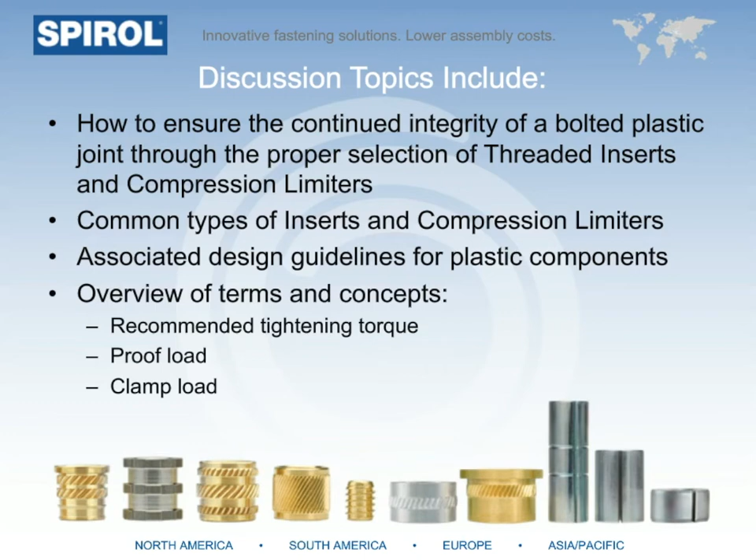So a brief overview about SPIROL. SPIROL is a global manufacturer and supplier of engineered components used for joining, fastening, and assembly. We have 12 major product lines, each one designed to improve product quality, simplify the assembly process, and/or reduce the overall cost of the assembly.

We're the only company who designs and manufactures both our engineered fasteners and installation equipment. Our focus is not just about supplying high-quality product, but working with our customers as early as possible in the design stage to help them design not only the fastener, but also make the critical recommendations between our product and their components so that their assembly goes together and stays together for the intended life of the assembly. To accomplish this, we have applications engineers located around the world who are ready to work with you on your new or existing applications.

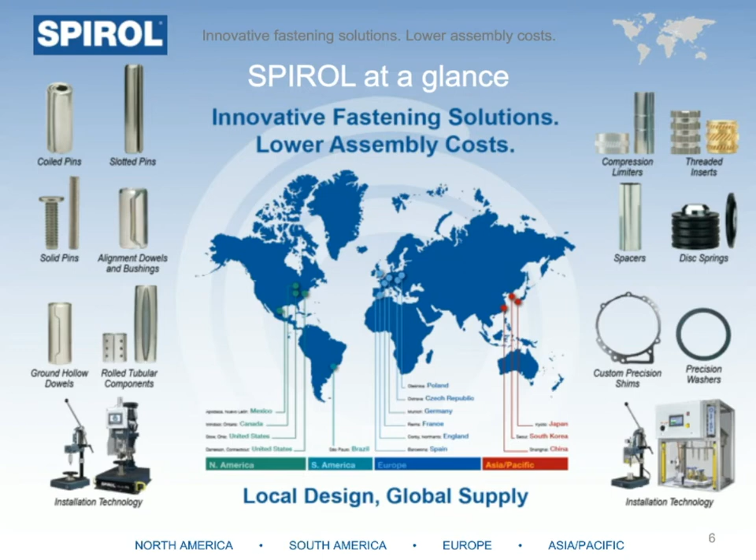So today, obviously, we're focused on inserts and compression limiters for plastics assemblies. So where are the inserts and compression limiters really used? Well, in short, they're pretty much used everywhere in every market, such as automobile, agricultural equipment, rail, recreational vehicles, and they're also used in home appliances, medical equipment, hand and power tools, industrial equipment, and airplanes. They're literally used everywhere.

Some of the specific applications within these markets can be seen here. In the top left, we have compression limiters used in the front engine cover so that when the cover is bolted down, these limiters provide spot reinforcement to prevent the plastic from cracking. Next, you can see compression limiters in an intake manifold and compression limiters in a residential charging connector for solar-powered homes. In the lower left-hand corner, there's an example of threaded inserts used in a high-voltage switch assembly.

An oven handle where the bolt is threaded directly into the metal insert rather than into the plastic to ensure joint integrity over the life of the assembly. And finally, you can see an automatic pool cleaner housing that has literally dozens of inserts on both sides of the component.

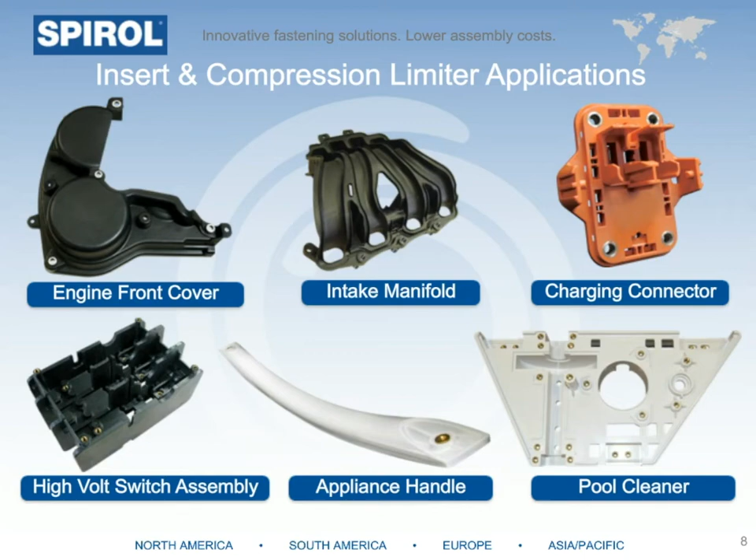Moving on to some of our important terms. When discussing the performance of our compression limiters and threaded inserts for plastic, it's important to tie them back to the component that designers are typically more familiar with, the bolt.

Bolt performance is defined by an industry specification that outlines how much force the fastener can withstand before breaking. The proof load is the maximum load that can be applied to the bolt without risking permanent deformation, where the bolt will not return back to its preloaded condition when the joint is loosened. The clamp load is how much load is applied to the bolt when the joint is tightened. SPIROL recommends that a joint is tightened to the clamp load up to 75% of the proof load because the bolt's load is directly related to the torque that the manufacturer applies when using a wrench or a torque gun.

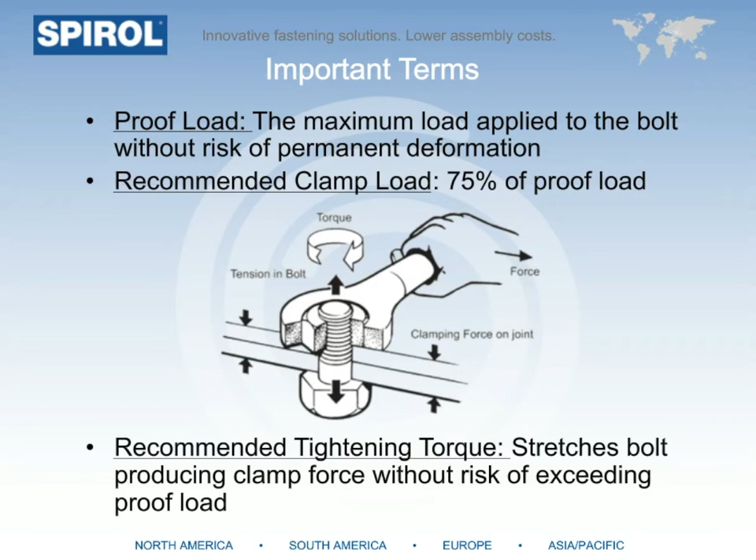The amount of load that a bolt can withstand is typically defined by the thread size and the grade for inch bolts, or the class for metric bolts. These are the most common bolt specifications defining bolt strength.

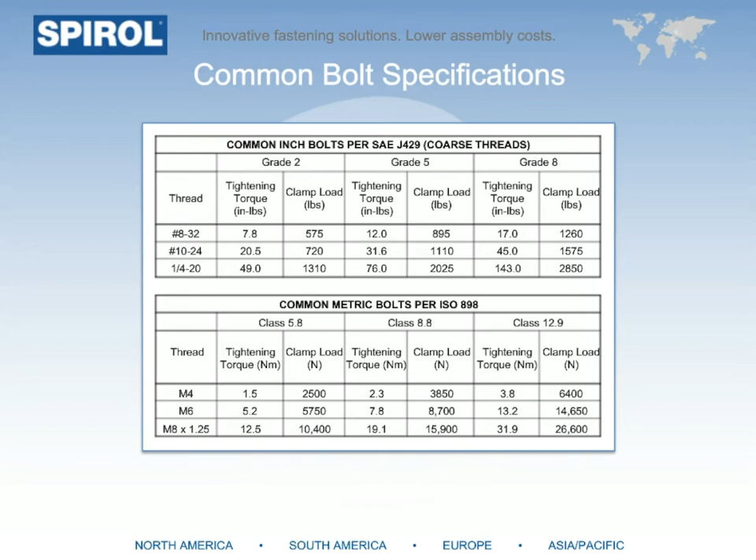So why do people use threaded inserts in plastic? Well, first and foremost, inserts provide reusable threads and secure tight threaded joints. Since you thread directly into metal rather than into plastic, you have unlimited assembly and disassembly without fear of stripping the threads.

You're also able to meet the proper seating torque for the bolt, given that the integrity of the plastic is there. And unlike when you thread directly into plastic, you do not have to worry about stress relaxation or creep that could result in a loose joint.

And finally, given that the OD of the insert is approximately 2 times the OD of the bolt, this results in 2 times the shear surface for enhanced load carrying of the bolted assembly.

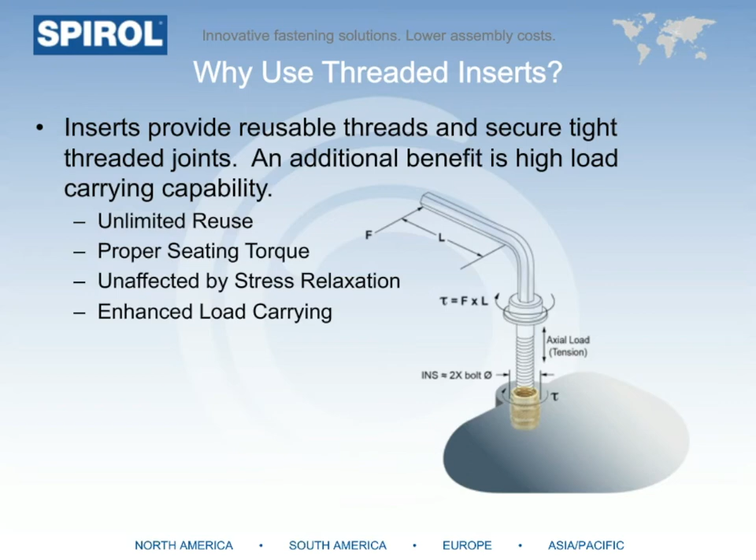Before we talk about what types of inserts are good for particular applications, we first need to review that there are 2 major types of plastics: thermoplastics and thermosets. Thermoplastics essentially can be melted and remelted a number of times into a number of different shapes without compromising the mechanical properties, whereas thermosets have a one-time reaction from liquid to solid and cannot be remelted.

Both thermoplastics and thermosets can be strengthened, though, through the use of glass or mineral fillers. Usually the higher the percentage of filler, the stronger the plastic.

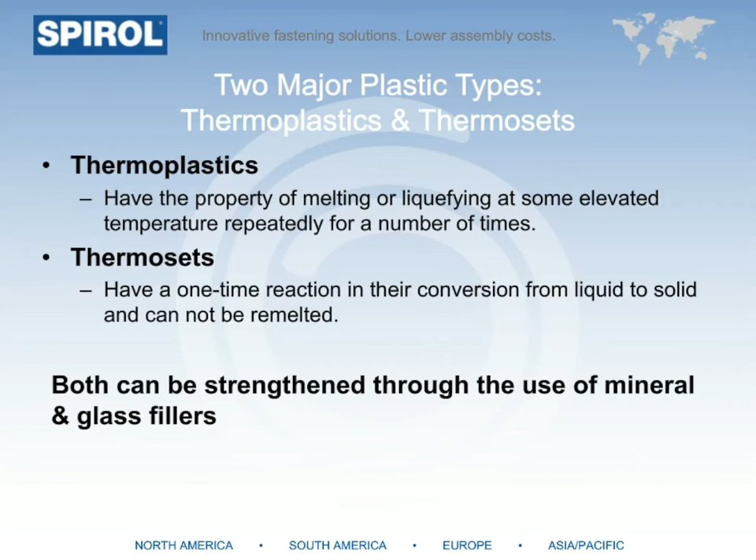SPIROL threaded inserts are categorized by the primary method of installation. Some inserts are designed to be molded into the plastic when it's fluid. This lets the molten plastic flow around and into the more aggressive features on the outside of the insert.

Most inserts are designed so that they can be installed as a secondary process after the plastic is cooled. These are referred to as post-mold installed. Post-mold inserts can be installed a variety of ways, by either locally remelting the plastic, by pressing them into the plastic holes, or even by screwing them directly into the plastic.

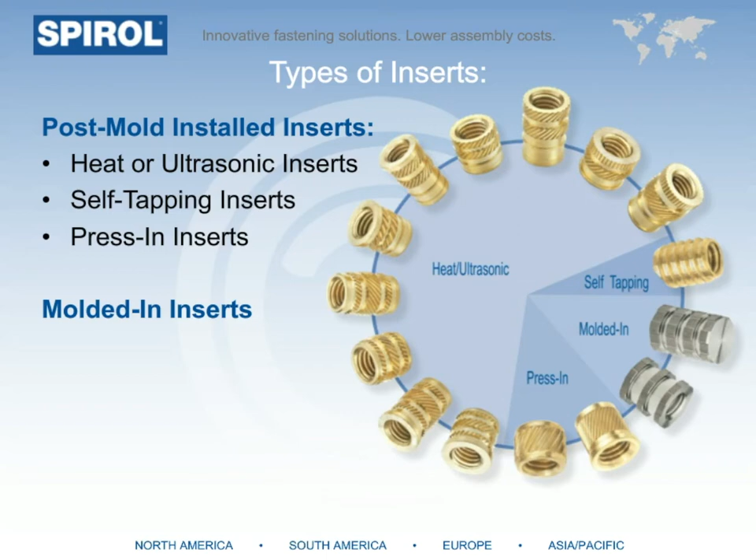Inserts should be designed with sufficient torque resistance to accommodate the tightening torque required for the bolt to prevent loosening and to achieve the pull-out values necessary for the load conditions that the insert will be exposed to while in service. In general, the resistance to rotational torque is a function of the insert's diameter, and the resistance to pull-out, also known as tensile, is a function of its length.

The designer's challenge is to determine the best balance between these 2 design criteria and optimize the performance in the space allotted.

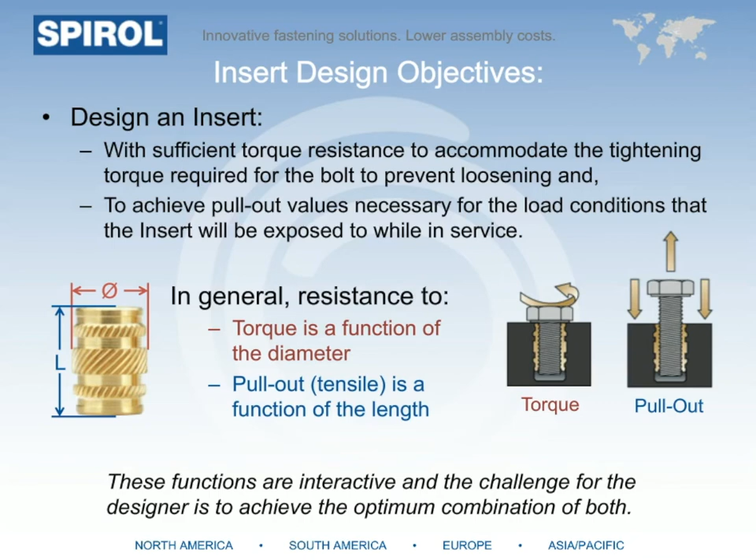The internal threads of the inserts are designed around industry standard metric and inch bolts. As far as the external features of the inserts go, essentially, performance of the insert is generally achieved based on the amount of displaced plastic filling the various types of features of the insert.

There are typically 3 different types of knurls: diamond, straight, and helical, and they are primarily used to increase resistance to torque. Straight knurls have the best resistance to torque since they're perpendicular to the force, whereas helical knurls provide resistance to both torque and pullout as they're at an angle.

Finally, diamond knurls, frankly, they're just not great for much of anything. The reason being that if you press a diamond knurled part into plastic, the diamonds literally shred the plastic during insertion. The most popular type of insert where you see this diamond-style knurl is on what they call an expansion-style insert, shown here in the upper left.

As the insert is pressed into the plastic hole, the slot closes. As the bolt is installed into the internal thread of the insert, the bolt ends up opening up the insert and pushing the sides of the insert against the hole wall, such that the diamond knurl bites into the hole wall to hold the insert in place.

However, reality is performance of this style insert is pretty low, yet the cost is much higher than most other styles of inserts. As a matter of fact, SPIROL has since replaced the expansion style insert with other press-in styles that have much higher performance at a much lower cost.

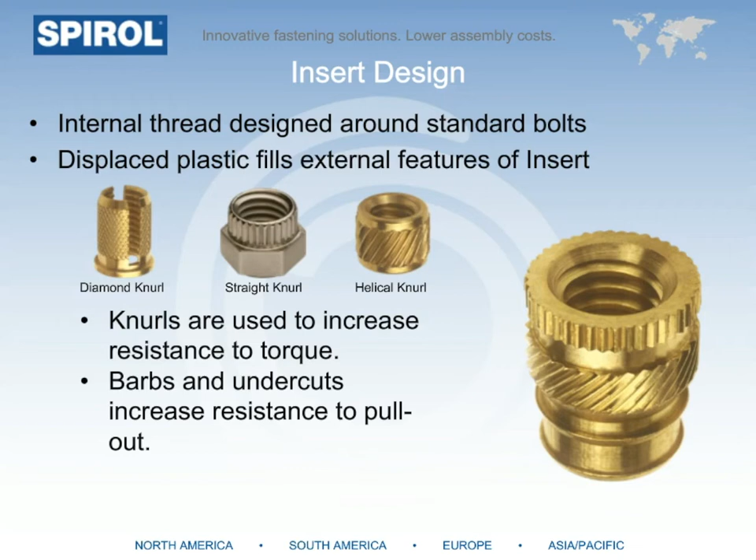So there are many different types of inserts, and in order to specify the best insert for a particular application, it's critical to understand the plastic specifics, meaning not just whether it's a thermoplastic or thermoset, but what specific type of plastic it is and what percentage of filler it has, and if possible, the brand name of the plastic.

So as an example, GE Cycoloy C2950, which is a PC ABS blend with 0% fill, or perhaps you're using DuPont Nylon 66 with 30% glass fill.

We also need to understand the geometry of the host component, including available space for the hole diameter and wall thickness, what bolt size you are planning on using, as well as the grade or class.

This is super important because, as Tara reviewed earlier, the class or grade actually dictates what the recommended tightening torque is for that size bolt. We also want to make sure we understand the performance requirements for the application—torque and pull-out or tensile—and what the mating component configuration is. And finally, how do you plan on installing the insert? Will it be molded in or post-mold installed? If post-mold installed, will it simply be pressed into the assembly, heat or ultrasonically installed, or tapped into the hole?

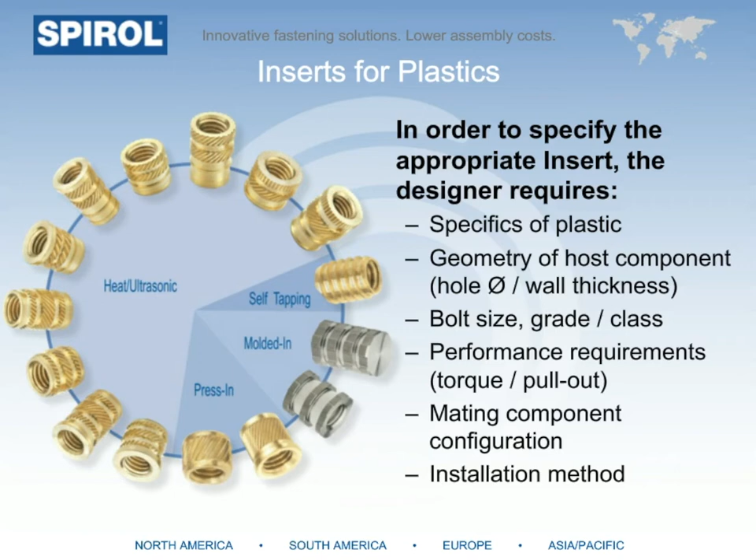As Christy alludes to, there are many factors besides insert design that impact how the insert will actually perform in the application. The quality of the interface between the insert and the plastic component is critical to how much the insert can withstand rotational and axial loading. Installation also greatly impacts the quality of this interface.

It's been said up to 75%. The image to the right demonstrates how SPIROL recommends validating installation quality through a destructive test. We recommend cross-sectioning the plastic with the insert installed so you can see the interface between the insert and the plastic.

There should not be any voids present between the insert and the plastic. Then the insert can be removed from the plastic, and you should be able to see a mirror image of all of the insert's features in the piece of plastic. As you can see in the incorrect example, the knurl's imprint in the plastic was very shallow, and there's no evidence that the barb actually engaged the plastic.

Some common errors that lead to poor installation are listed to the left, but in this example, you can see there was probably an incorrect hole size that was too large, not allowing enough plastic to flow into all of the insert features.

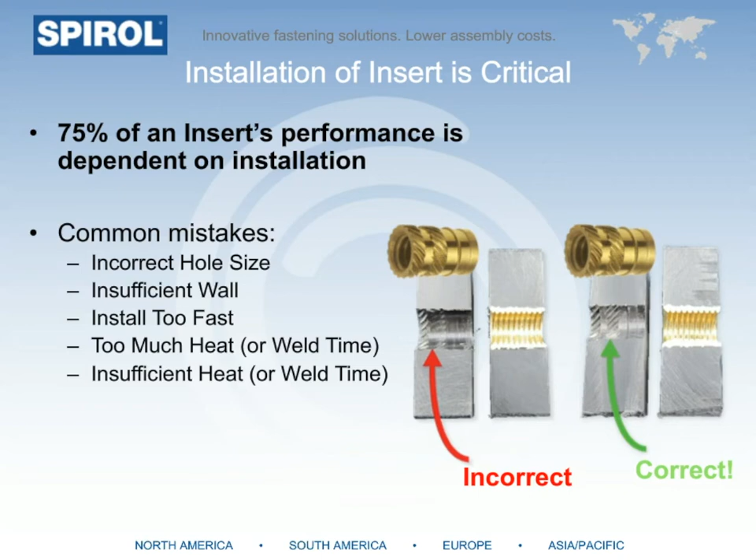It's not just the interface between the insert and the plastic host component that's critical to performance. The mating part also can significantly reduce performance by not providing enough of a bearing surface on the insert, which we call a jackout condition. With the hole size in the mating component larger than the face of the insert, there's nothing we can do to prevent the insert from dislodging and moving up into the void of the mating part.

To avoid jackout, we recommend that the mating component's hole be smaller than the face of the insert, but large enough so that the bolt can pass through.

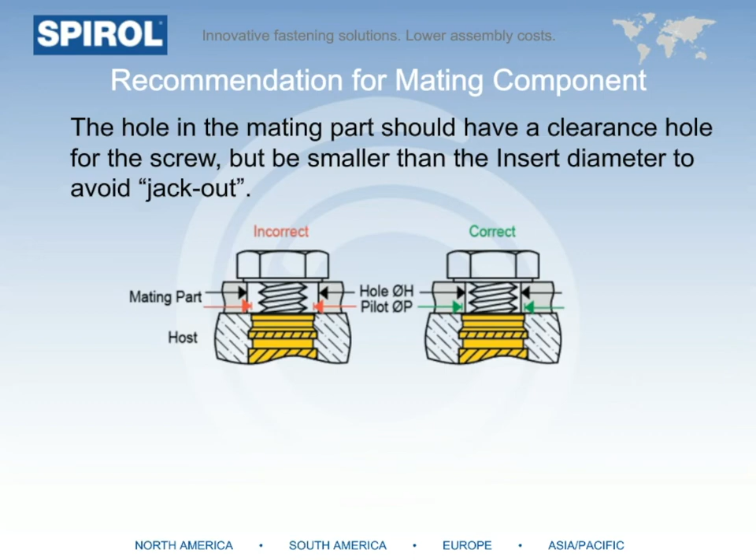When installing the insert into the hole, the top of the insert should be as close to flush with the surface as possible. Maximum protrusion above flush should be 0.13 millimeters, or 5 thousandths.

You really want to be careful about having the insert subflush, or else you risk jacking the insert out of the hole, or at least breaking the plastic plane while torquing down the bolt, which could affect joint integrity.

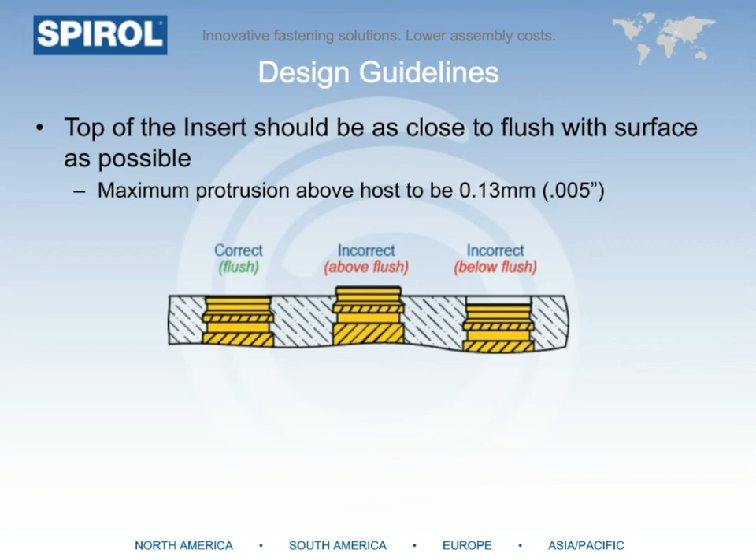In terms of the hole configuration, the diameter of the plastic around the hole, known as the boss diameter, should be sufficient enough to avoid bulging during installation and ensure integrity to withstand the recommended tightening torque. Also, the length of the hole must be long enough to prevent the screw from bottoming out in the event that it's a blind hole.

For heat or ultrasonic installation, the length plus 2 thread pitches is recommended to allow any flash or material buildup ahead of the insert a place to flow during installation.

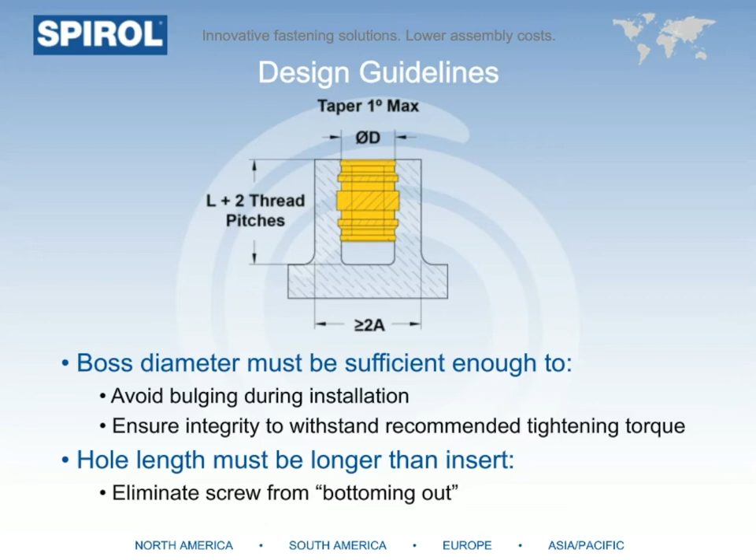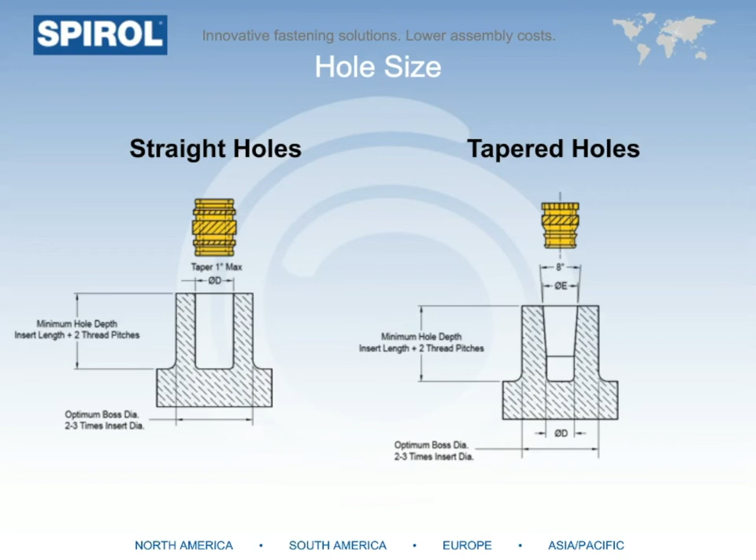The actual hole size is also critical to the insert's ability to perform in the assembly. For inserts used in a straight hole, it's recommended that the taper not exceed 1 degree inclusive, or half a degree per side. For inserts intended to be used in a tapered hole, the taper should be 8 degrees. The greater taper not only assists with removal of the plastic component from the mold, but also allows the insert to sit deeper in the hole, which facilitates square insertion and faster installation.

Regardless of hole style, it's imperative to hone in on the correct hole size for the application. As a general rule, larger hole sizes decrease performance, while smaller hole sizes induce undesirable stresses and potential cracks.

SPIROL's recommended hole sizes in our design guideline will typically need slightly positive adjustments, if any. Usually, the hole size needs to be adjusted upwards when the melted plastic is more viscous and does not flow very well, such as when fillers like glass are used. It is always imperative that the designer perform testing to validate the appropriate hole size for the application. SPIROL is also capable of assisting with this testing.

Just to show an example in the lower right, if there's no filler used, such as in a polypropylene plastic part, the recommended hole size for our M6 heat-installed insert is 8 millimeters with a positive 0.08 millimeter tolerance.

However, if the same component was nylon 6/6 with 35% glass fill, we would adjust this initial 8 millimeter hole recommendation up by 0.15 millimeters and then apply that 0.08 millimeter tolerance. The core pin used to mold the host hole should be large enough to allow for the plastic to shrink down once cooled and conditioned.

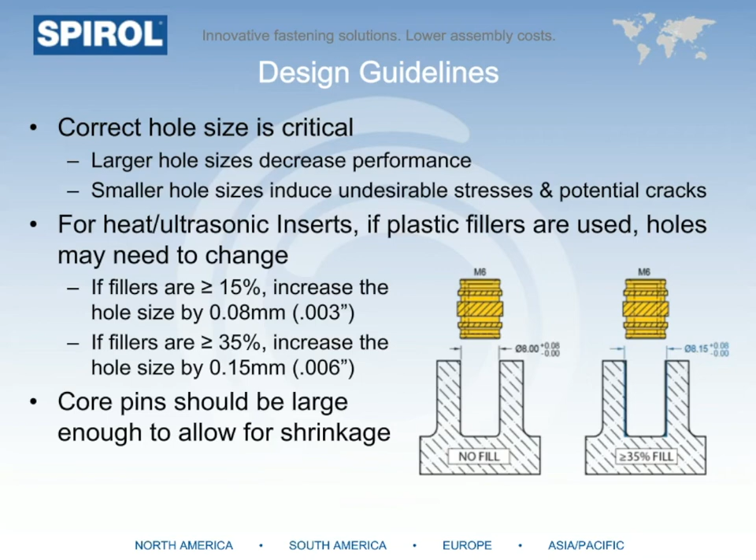In high-load applications, using a headed insert and locating the head opposite the load in a pull-through configuration warrants design consideration. That said, tapered inserts should never, ever be used in pull-through applications or in thin-walled bosses, as this will definitely cause cracking of the plastic.

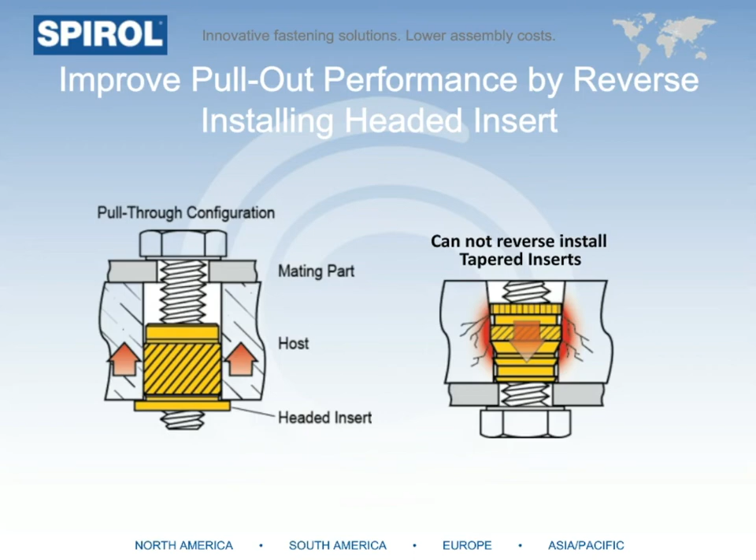Each type of insert differs in design, which yields different performance results, as well as the cost of the insert and overall cost of the assembly.

Starting with heat or ultrasonic inserts, some are designed for straight holes and others are designed for tapered holes. If you attempt to use a straight insert in a tapered hole, you will not optimize the performance of the insert design, and in many cases, you may end up totally cracking the plastic.

Symmetrical inserts require straight holes, and as Tara just said, tapered holes facilitate proper seating of the insert. Since the surface contact between the insert and the hole is maximized, installation time is usually less than that of a straight insert of the same size.

Many heat ultrasonic inserts are available in a long and short version of each thread size. Long lengths maximize torque and pull-out resistance, while short lengths are good for less stringent requirements at a lower cost and shorter installation times. You can also get most styles with or without a head.

The head provides a bearing surface for the mating component that also prevents jackout, or, as I said earlier, when used in reverse, can prevent a pull-through situation. However, adding a head comes at a cost because you have to start with a larger piece of raw material to create the head. Now, some non-headed versions are symmetrical, thus eliminating orientation during the installation process.

You can achieve excellent performance results with heat or ultrasonic inserts, provided that they are used in the proper hole size with sufficient wall thickness around the insert, and they are installed in a manner that results in proper melting of the plastic to fill the voids of the insert. Heat ultrasonic inserts generally provide the best balance between performance and cost.

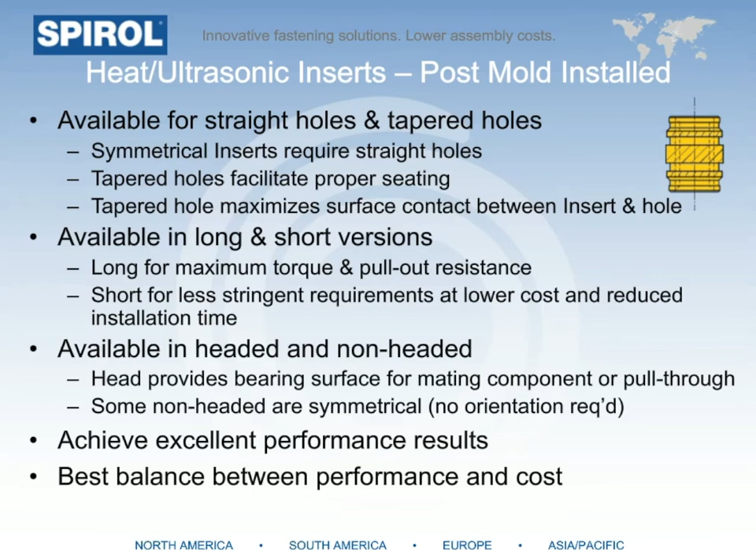Now notice the external thread on the self-tapping inserts. This type of post-mold installed insert is actually threaded into the hole after the plastic cures. The external threads are designed with a thin profile to minimize stress in the plastic and a relatively coarse pitch to provide the maximum plastic shear surface to resist pullout.

As a matter of fact, these inserts provide the best resistance to pullout of any of SPIROL's post-mold installed inserts. However, due to the external thread, the manufacturing cost of this insert tends to be higher than other types of inserts, and the cost of installation is the highest of all post-mold installed inserts, since care and time have to be taken to thread the parts into the hole.

The schematic in the lower right shows that the recommended length of the hole for this style insert is 20% longer than the length of the insert.

Counterbores are not recommended for any insert types except self-tapping and headed inserts. Counterbores are recommended for self-tapping inserts to reduce the risk of flaking. The outside diameter of the counterbore should be equal to or larger than the outside diameter of the self-tapping insert.

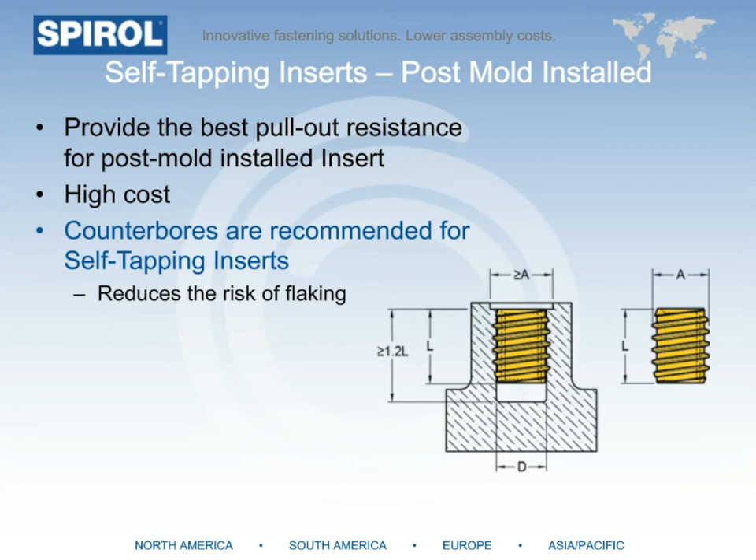Press-in inserts are designed to reduce installation costs. Helical knurls provide both torque and pull-out resistance. A pilot facilitates straight insertion into the hole. The pilot diameter is only slightly smaller than the hole, and the length is long enough to allow the insert to sit at the top of the hole prior to installation.

Press-in inserts are available with or without a head and provide good resistance to torque and pull-out. They are a great low-cost option for applications not requiring super high performance.

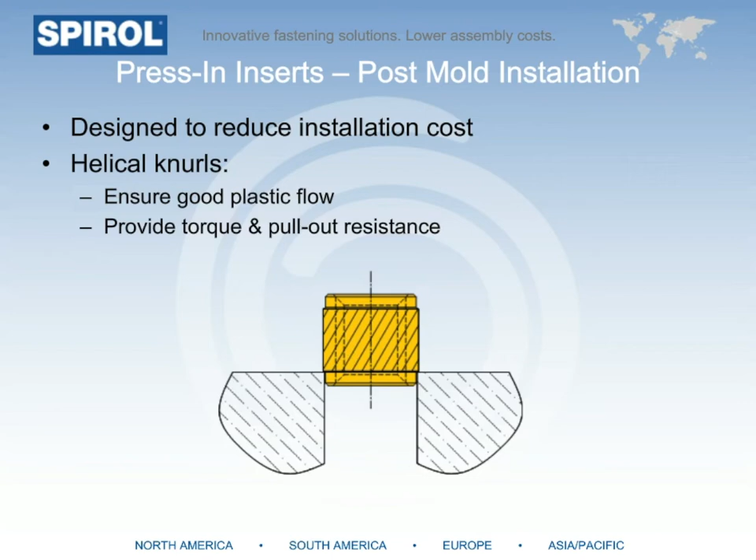On the other hand, molded-in inserts are designed for maximum pull-out and torque performance and are often the insert of choice for thermosets and engineered plastics with a high percentage of filler. The minor thread diameter tolerance is controlled to provide a repeatable fit on the insert on the core pin.

SPIROL offers a symmetrical version, eliminating the need for orientation, and a blind-ended version, which sometimes is preferred by molders. Unlike the rest of our brass inserts, these are made from 2024 aluminum, a lightweight, lead-free grade.

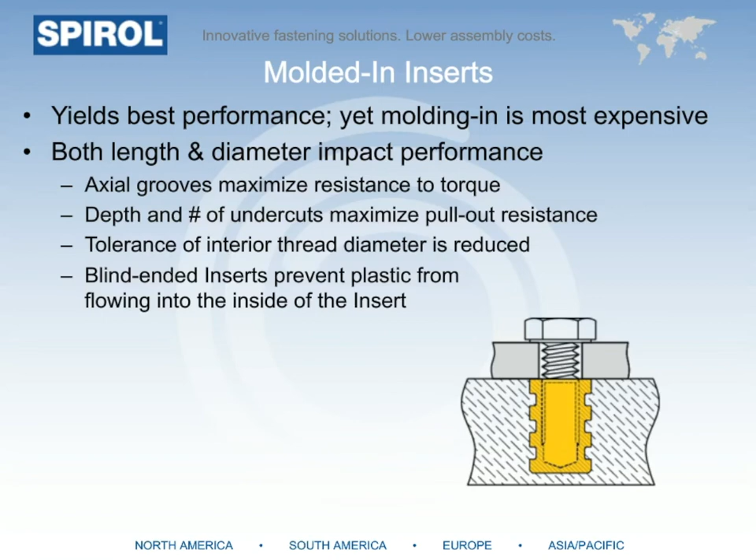In terms of using post-mold installed versus molded-in inserts, there are many factors to consider. Installing inserts after molding reduces in-place cost since molding time is shortened—there's no placing of the insert over core pins. Secondary cleaning of flash or plastic around the entrance to the hole, which often occurs with molded-in inserts, is also eliminated. Installing inserts after molding also reduces rejects and the chance of mold damage from a dislodged insert. Keep in mind some of these molds cost tens of thousands of dollars. Finally, a post-mold installed insert can yield excellent performance results.

Conversely, when molding inserts into the assembly, molding time is increased since you need an operator or a pick-and-place robot loading the inserts over the core pins prior to closing the mold cavity. Also, precise placement of the inserts is required, otherwise mold damage can occur, which can be really expensive since molds are expensive and so is downtime. That said, of all the different types of inserts, you definitely get the best performance out of molded-in inserts. So the real question is, what performance do you actually require for your assembly?

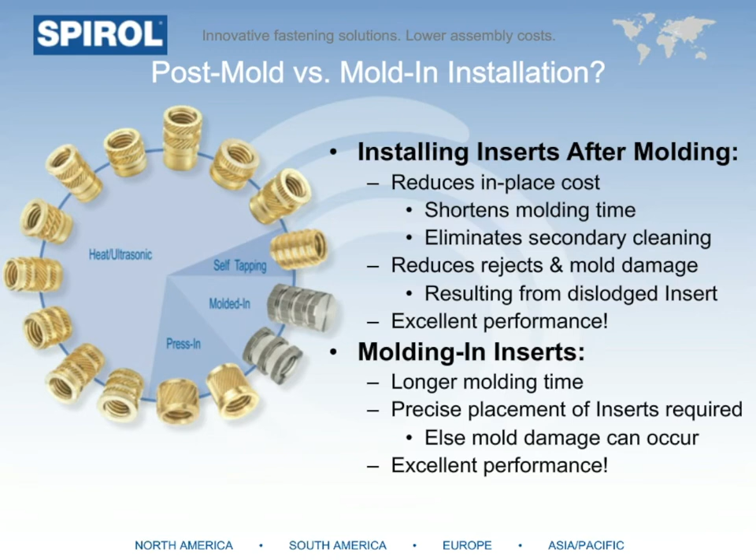One question we see all the time is: what affects the performance of an insert? The fact is there are so many variables that impact insert performance in an application—not only the insert design and the quality of features such as knurls, bands, and undercuts, but also the specific type of plastic will generally affect performance. For example, an insert installed in nylon 6/6 with glass fill will totally outperform a talc-filled polypropylene.

Also, the design and quality of the plastic molded part plays a huge role in performance. For example, are there knit lines in the boss surrounding the insert, or is the wall thickness of the plastic sufficient to handle the applied stress? Obviously, the actual hole size will also affect performance, and even hole size variation within the recommended tolerance range can impact performance greatly.

And finally, the installation quality impacts performance. For example, was the proper temperature used? Were the inserts installed too quickly? And so on and so forth.

In regards to temperature, another question we often get is what temperature should heat-installed inserts be installed at? We recommend starting with a temperature of 50 degrees Fahrenheit above the initial softening temperature for the plastic in question. For plastics with fillers, this initial differential should be increased to around 150 degrees. Pressure is insert-size dependent and should be as low as possible, in the 5 to 15 psi range—just enough to push the insert into the hole as the plastic melts.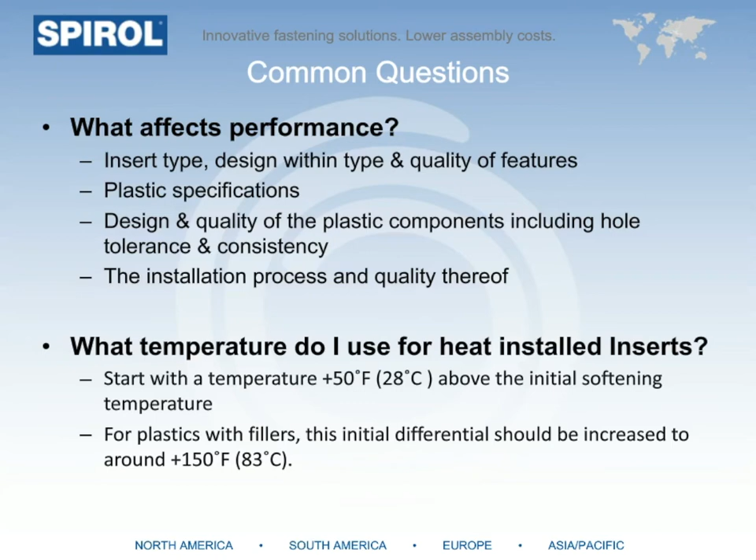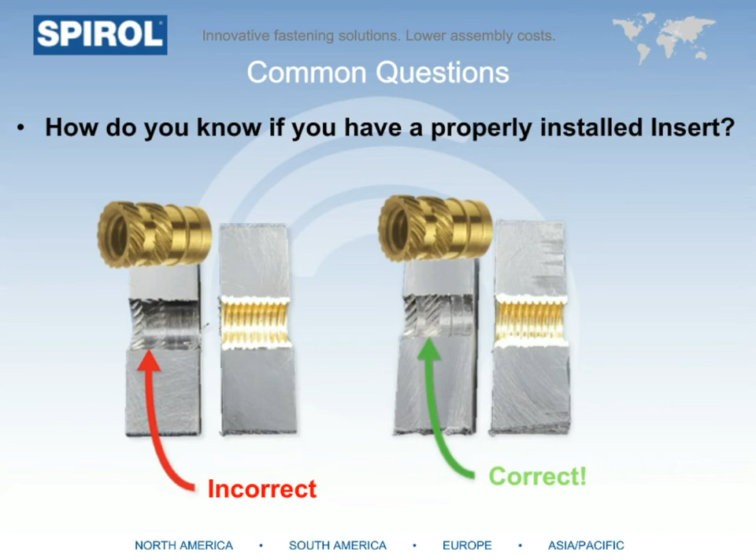And this by far is the most common question: how much torque or tensile strength can be achieved in my particular application with my specific plastic assembly? The reality is it's impossible to answer without testing in your actual assembly. Of all the factors that affect performance, and in addition, there are so many different types of plastics and fillers, and then percentage and orientation of those fillers within the plastics, coupled with the complexity of component design—it just makes it impossible to provide insert performance data which can be applied to specific applications.

Spirol provides a section in our design guide that displays the performance of various style inserts installed into nylon 6/6 without fillers, in drilled versus molded holes. There's a screenshot of that on the slide right now. The performance data here is provided as a comparative guide between insert types, not to provide the actual performance that will be achieved in a specific application. For this, you will definitely need to test.

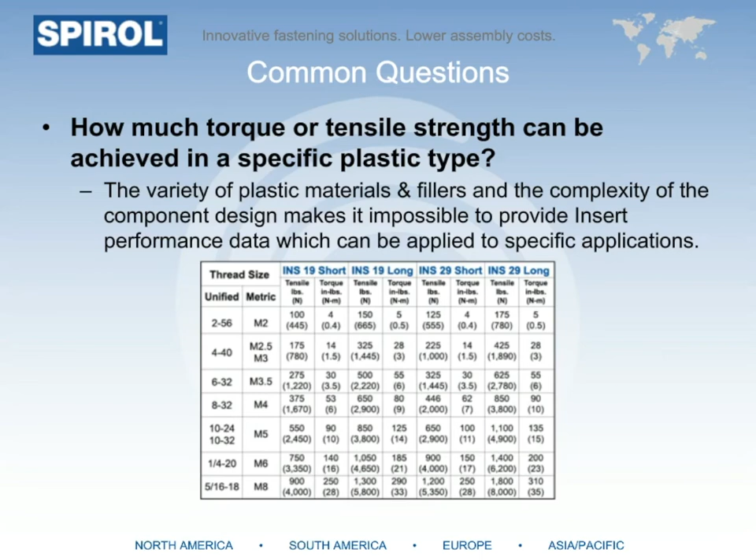Now let's talk about compression limiters. This section is going to go a little bit quicker because a lot of the same concepts apply as when we talked about the insert. So what are compression limiters?

Essentially, compression limiters are spot reinforcement of metal in a plastic assembly designed to protect the plastic from cracking or yielding under the compressive load of a bolt. In a bolted joint assembly, the objective is to not stress any component beyond its elastic limit.

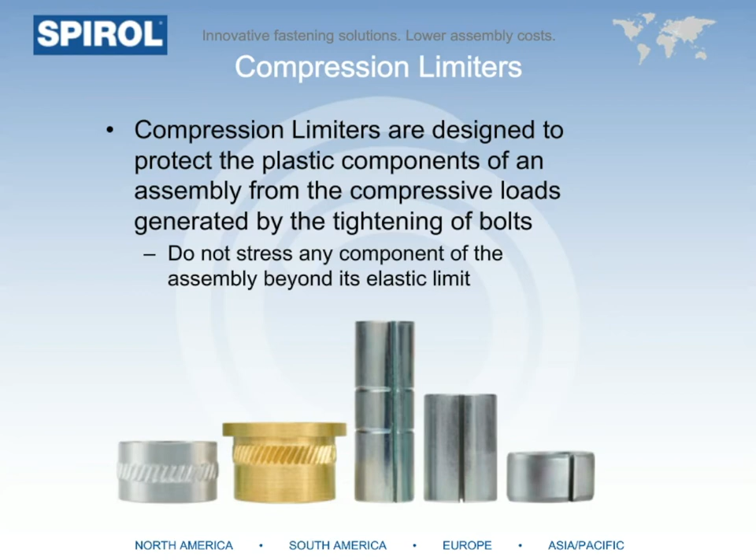The ability of the compression limiter to carry a compressive load is determined by two factors: the strength of the material and the cross-sectional area of the compression limiter. Limiter strength can be increased by increasing the wall thickness, increasing the strength of the material or the type of material, or a combination of both.

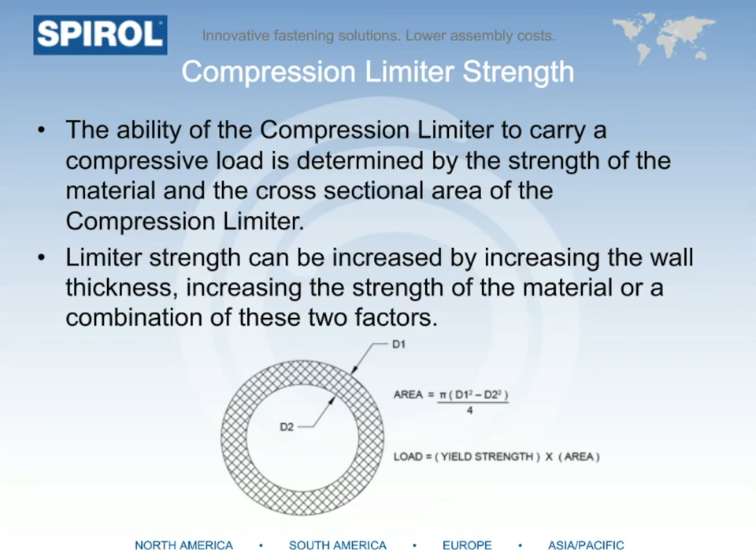There are two critical design conditions to consider when using any compression limiter. Rule number one is that the bolt or washer must contact the compression limiter. This condition must be met without exception.

If the bolt does not contact the limiter, it will result in plastic creep and ultimately loss of compression over time. The image on the right would not be acceptable if the bolt was fully torqued down. In this case, the compression limiter isn't doing anything at all, it's just adding cost to the assembly with no value. The image on the left shows a proper bolted joint.

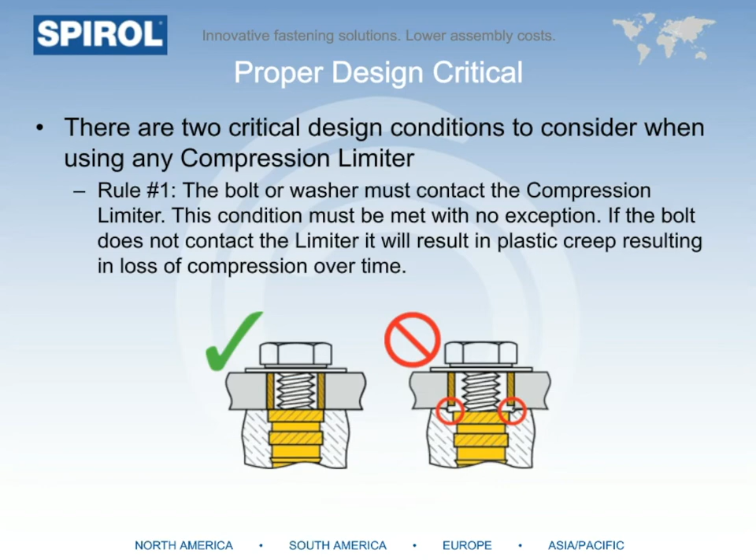Rule number two, and it's more of a guideline, is that the plastic should have a small amount of compression. If the plastic is not compressed, the host component could move about the compression limiter.

It's important to note that the delta showing the gap between the bolt flange and the limiter only exists prior to torquing the bolt down. Once the bolt is tightened, the plastic has to be compressed to get the metal-on-metal contact just mentioned. That's non-negotiable.

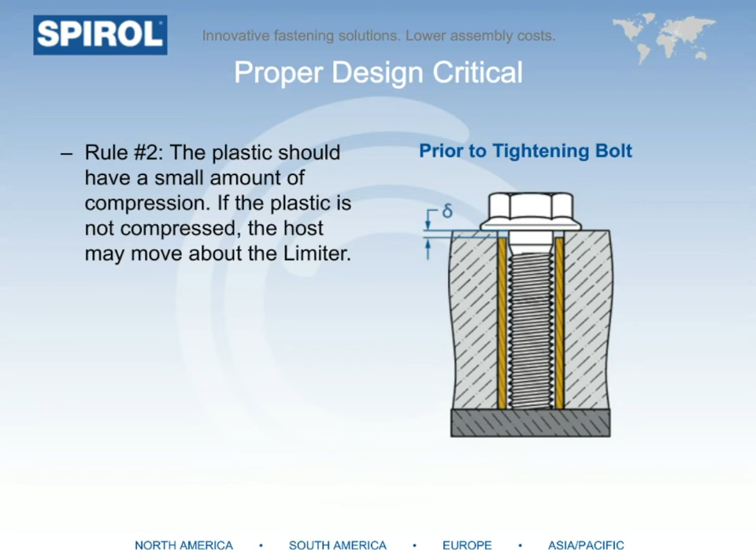So in order to properly evaluate an application and determine the most appropriate compression limiter, the following needs to be understood. It's important that both the bolt size and the class or grade is known, as the class or grade will dictate the recommended tightening torque, which ultimately determines how much force the compression limiter must withstand. We're hammering that home because we'll often get an M6 bolt and have no idea what the class is for that bolt.

We also need to understand the max allowable compression of the specific plastic. Most plastics can compress between 5 and 15%. The plastic thickness and compression limiter length tolerances are also very important, as ideally we would like the maximum compression limiter length to be equal to or below the minimum thickness of the plastic without exceeding the max compression of the plastic. See how these are intertwined?

The yield strength of the mating component is also important, as we want to make sure that you don't indent the material of the mating part, creating witness marks when the bolt is torqued to the recommended tightening torque. Finally, we want to understand the environment to which the compression limiter will be exposed, as well as the specifics of the material of the mating component, so that we understand both the environmental and galvanic corrosion requirements.

So here's an example of how we use some of the information we just talked about. If we don't have any information about the plastic's modulus of elasticity, we'll typically assume a conservative compression amount of 3% of the plastic. In this example, the customer is early in the design stage.

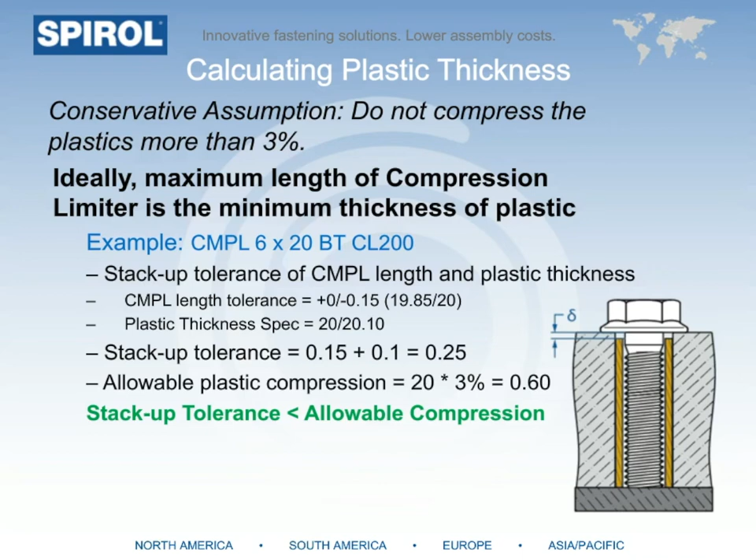Now to tie in the rest of this information that we just discussed.

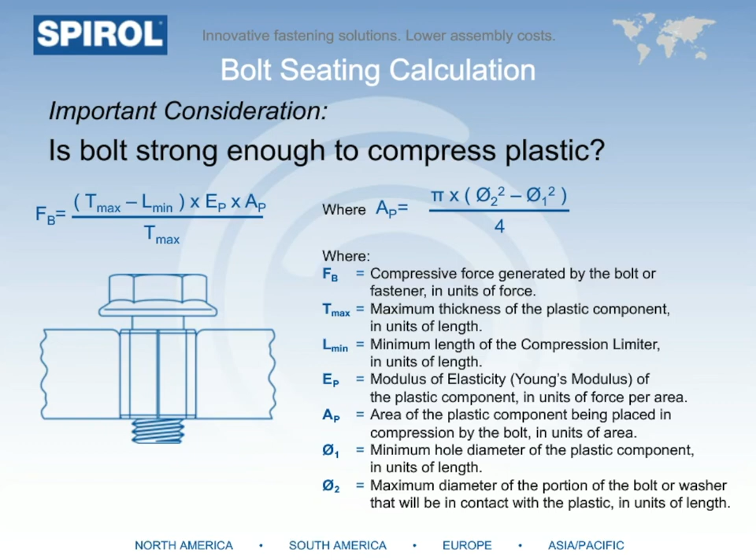In terms of selecting which type of compression limiter is best for your application, there are a variety of compression limiters available, usually designed around standard bolt requirements and the method of installation. The overarching difference between the types we're going to talk about are limiters rolled from steel and those machined from aluminum and brass. Within the roll formed steel category, we offer a split seam for post-mold installation or a butted seam for molded in. These are offered with an oval shape to accommodate a wider tolerance in one axis for easier alignment, just another option.

This is particularly useful when you're using multiple limiters in an assembly. Within the machined category, these can be installed either by pressing in or molding in. You don't need to specify a particular machined version to match the installation method. A head can be added to increase the bearing surface against the mating component or the bolt. Unless there's a concern with galvanic corrosion, aluminum is generally preferred over brass because it's lightweight, lead-free, and stronger than brass.

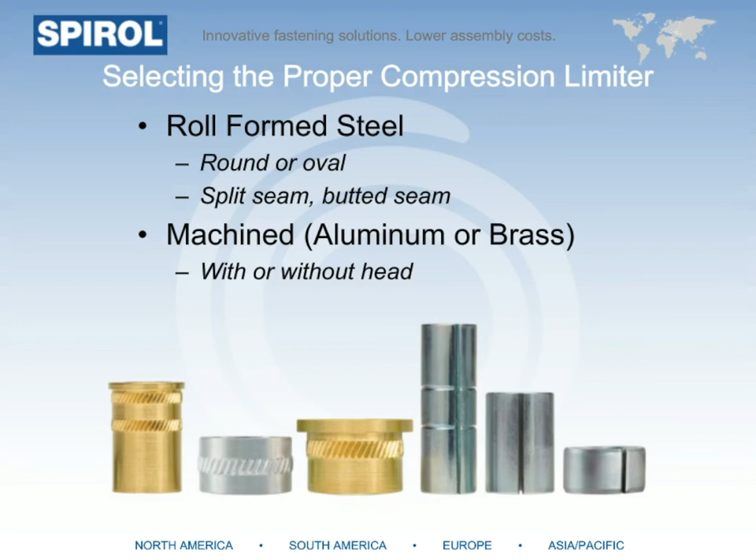In terms of how to choose between machined or roll formed limiters, the reality is that when it makes sense, rolled steel is definitely the most economical option. However, for short compression limiters, particularly when the length to diameter ratio is less than 1, it makes most sense to use a machined limiter because it's difficult to roll a limiter that short and keep the end square. Also, machined limiters are preferred in mold-in situations where the plastics have very low viscosity since there are no seams for the plastic to seep into. Machined limiters can be supplied with a head for a larger bearing surface for soft mating materials. A head also eliminates a washer.

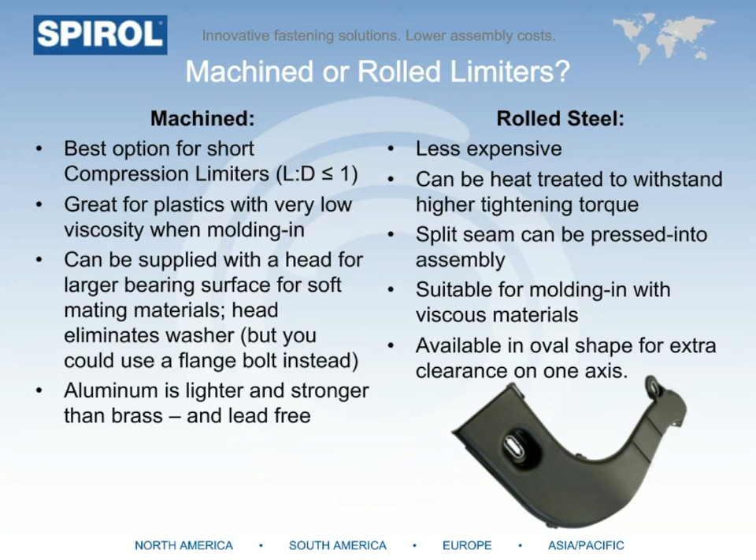To summarize the design considerations for compression limiters we just covered, our most important criteria is that you get that metal-on-metal contact, or the bolt flange on compression limiter on mating component contact once the bolt is tightened. Remember, without this, you're adding costs to the assembly with no value. Then, ideally we want some plastic compression where the host thickness is greater than or equal to the compression limiter length. The plastic must be able to withstand the clamp load of the bolt without exceeding its elastic limit.

If this is not possible, we're happy to offer a recommendation for how to optimize your joint and still achieve that critical metal-on-metal contact. Just like the plastic, we also need to make sure that the bolt does not exceed its elastic limit by assigning a clamp load up to 75% of the proof load. If an insert is used, like in this example, the limiter should be well aligned to prevent a jackout condition. And lastly, the host hole size is critical to ensure the compression limiter can retain its position in the host prior to bolting the assembly.

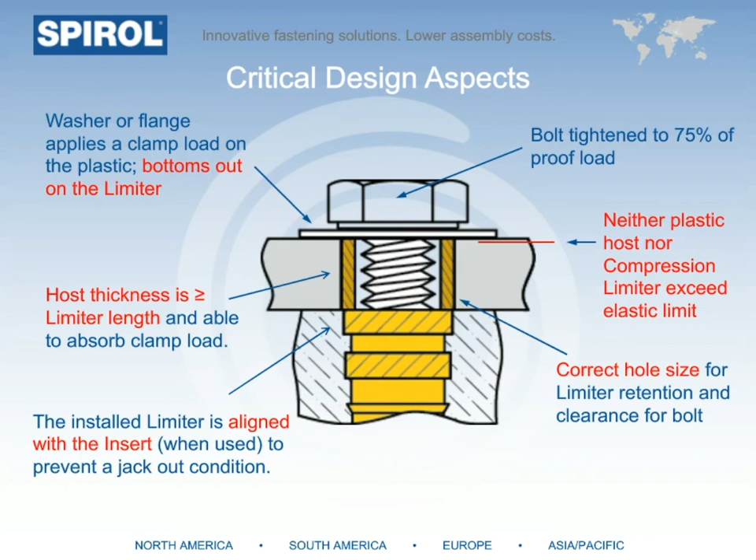So in conclusion, think about inserts and compression limiters as early as possible in the design stages of your project. This will help you design in standard components, which reduces time and cost since they can likely be supplied from stock. Also, don't over-specify your requirements. If you say to a manufacturer, just give me the insert with the highest torque and pullout, when your assembly doesn't require high performance, you're going to be paying a lot more for something you don't actually need.

When designing your assembly, use the proper design parameters, and please do yourself a favor when switching from one supplier to another: provide the actual performance you require for your assembly versus saying, just give me the same or higher performance than I'm getting right now with my current parts. And recognize that if you ask one manufacturer to make the exact same part as what someone's already making, you're usually going to pay more from the new manufacturer because they're not set up to make that part. And finally, after all is said and done, make sure to test the bolted assembly to ensure that your performance requirements are met.

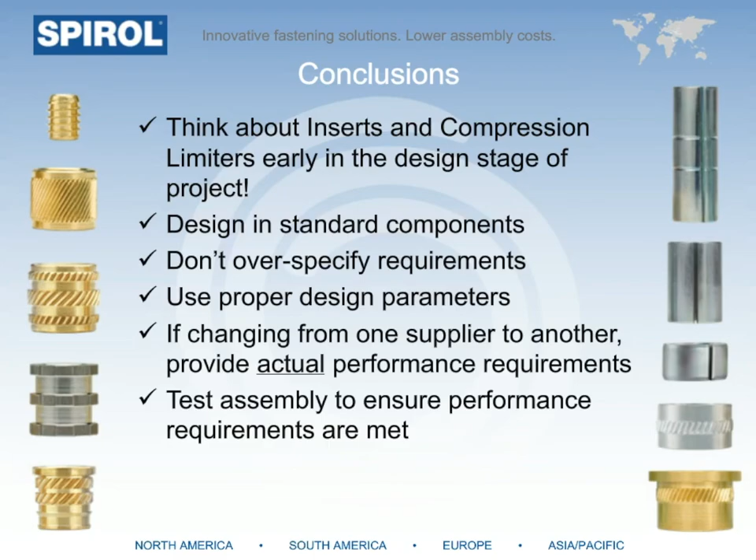If you're interested in learning more about inserts and compression limiters, I encourage you to visit spirol.com and download the application stories and white papers. We also have 3D models available from our website that you can download or insert directly into the model of your assembly.

If you're working on a new design, involve SPIROL as early as possible. We'll conduct a comprehensive evaluation of your application, then provide you with a detailed engineering report complete with samples for testing and approval, provided that we can equip you with a standard component.